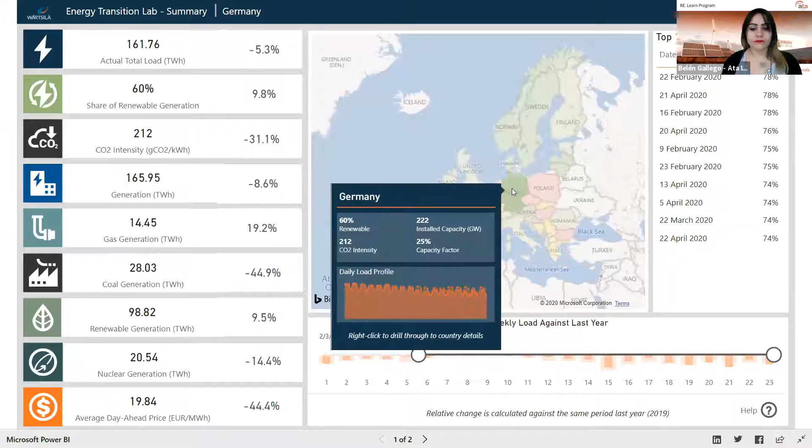So if we drill down to Germany, for example, we come to another page here. I will click on the overview to start with. So here we see the overview stats, most of the same stats as we had on the first page, but with a little bit more detail. We see the generation mix on the left, total load, and then generation by production type below. But if we take a look at the total load, I will open this up a little bit more to see more closely what is happening here.

So this is now showing, I will click on the blue dotted line. This blue dotted line here is last year's electricity load, the load on the German system. And if we then compare that to the total load for this year, we see that the total load has actually dropped quite heavily. We see it starting here from mid-March, and that's when the crisis really hit Germany and when the lockdown started to happen.

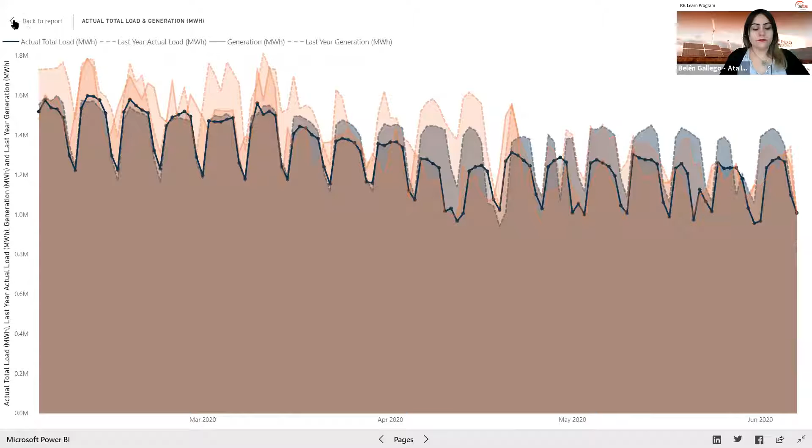And after that, it has gone down, and these are, by the way, the weeks we see here. So this is the middle of the week, and the bottoms here, the troughs, are weekends. As it usually goes, weekends have lower electricity consumption as industry is closing down for the weekend, and then it's starting up again on Monday. So you actually see the weeks in the system, and we see here how the COVID situation has impacted electricity consumption. So it is visible in countries how the coronavirus has impacted the power system.

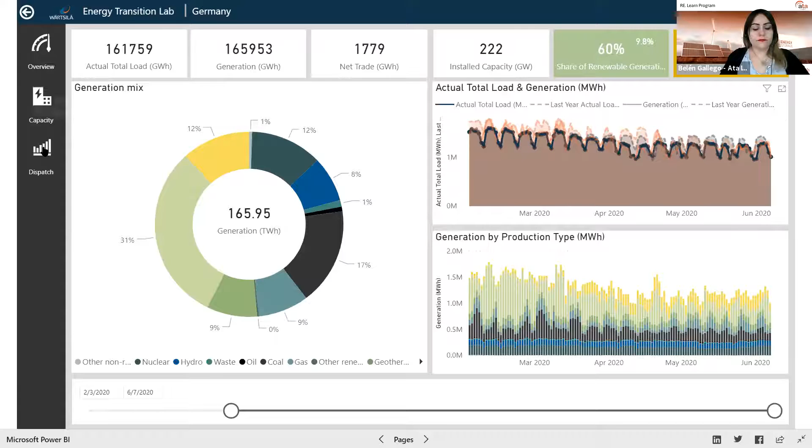If you take a look at the dispatch page here, and if we take a look at Germany as such, this is now showing the dispatch of the German system hour by hour, how it really was. You see here in the bottom we have the nuclear, we have hydro, we have coal, and then on the top here we have light green, we have wind, and then the yellow is solar.

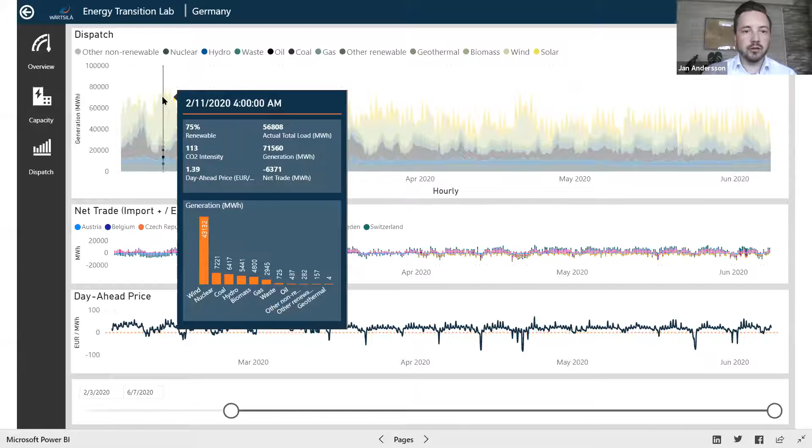And we see in the beginning of the period here, it's still February, so the solar is not generating that much due to the winter season, but the further towards the spring and summer we get, the more and more we see of solar generation. And on a high level look, everything looks very fine here. There are no big issues.

But if you start to drill down, let's take one of the top days here. I will move the slider to April 20th and 21st. So take April 19, and then I take the other slider down to April 22nd. So here we have now April 21st, one of the top renewable days in Germany.

And we see we have a massive solar peak here in the middle of the day. We have a lot of wind coming in. It was a windy week apparently in Germany, and good sunshine. And we see here middle of the day in Germany a renewable generation of 84% penetration. We see a total load of 65 gigawatts, and the generation was actually 82 gigawatts, so not really matching there.

And the interesting thing we see here is that the day ahead price in the box there in the middle of the screen hits minus 84 euros per megawatt hour, and we see also down in the graph here on the bottom, the day ahead price throughout almost the whole solar peak, we have hugely negative prices in Germany.

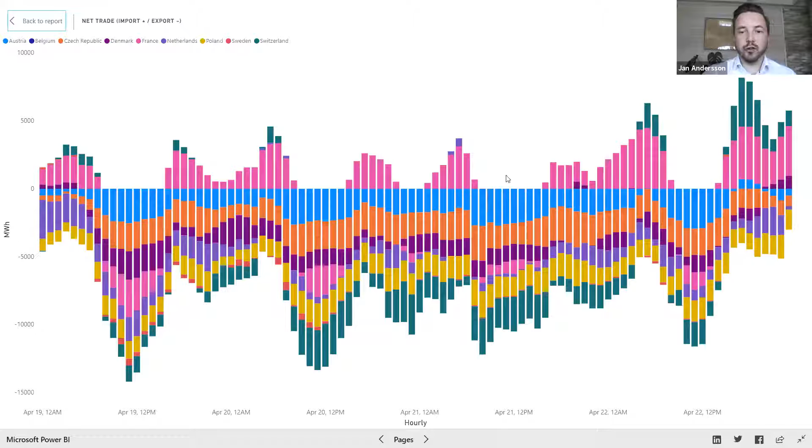So if we drill down to the import-export here, in the middle of April 21st, Germany is exporting a lot of power to the neighboring countries. And as I said, as the power price is negative, they also have to pay the other countries to take the electricity away from them. So these are really interesting stats that we can see.

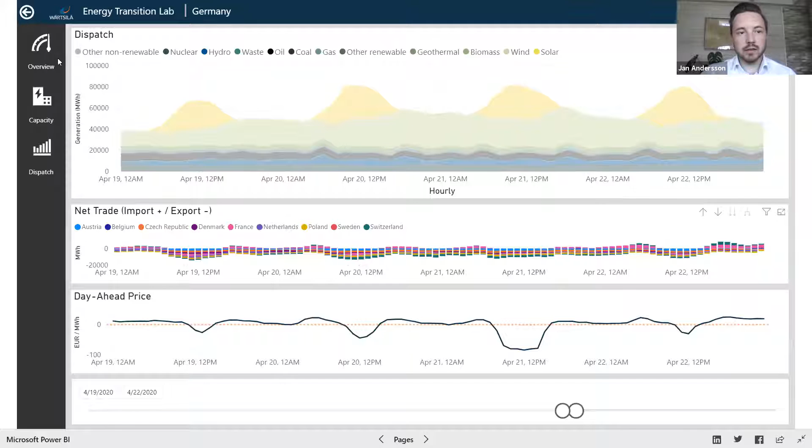If we go back up to the European level, we can take a look at another country here. I will drag the sliders for the days again. So let's take a look at Italy, for example. Italy has now been, let's call it, the poster child for Corona lockdowns. And we go to the overview again to see the load curve.

So if we look at the Italian load here, same curve again. The dotted blue line is last year. I will highlight that by clicking on it up here. This is the last year load. And if we look at the load for this year, we see a tremendous drop here in the beginning of March when the lockdown hits in northern Italy, and now in the last weeks it's starting to come up towards normal levels again, but it's still impacting the load.

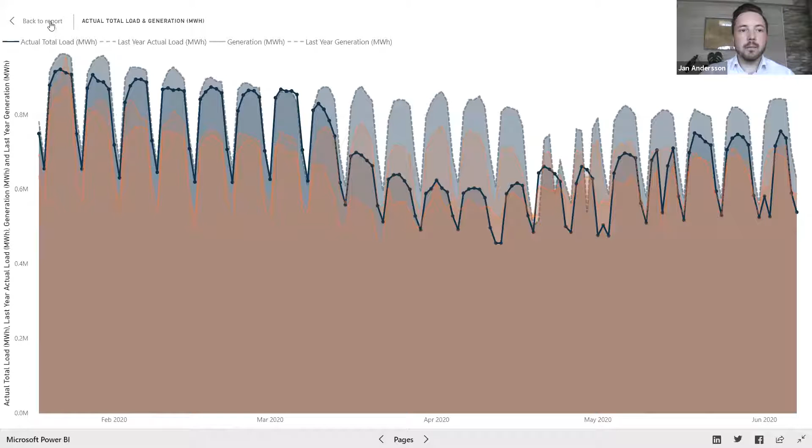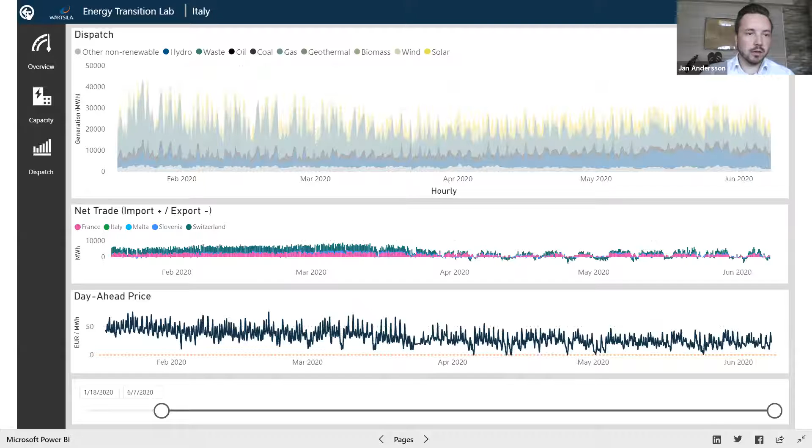So this is really interesting, and we see the same kind of trends for the dispatch as well in Italy. We see an increasing share of renewables, but we also see that gas... Let me go to this one here and zoom in on Italy, because we have easier to see numbers here. So we see that gas generation, coal generation is all down, and day ahead prices are all down.

However, if we look at it on a weekly basis, we see that gas generation is actually making up quite a lot of the gaps between renewables and everything else. So even though the gas generation is down, it is taking the intermediate role there in Italy quite a lot.

I can still maybe take you to Spain as well, to take another country in Europe. And I do encourage everybody online here to take a closer look. This is open to everybody, as said. So just type in Energy Transition Lab in Google and you will find this page.

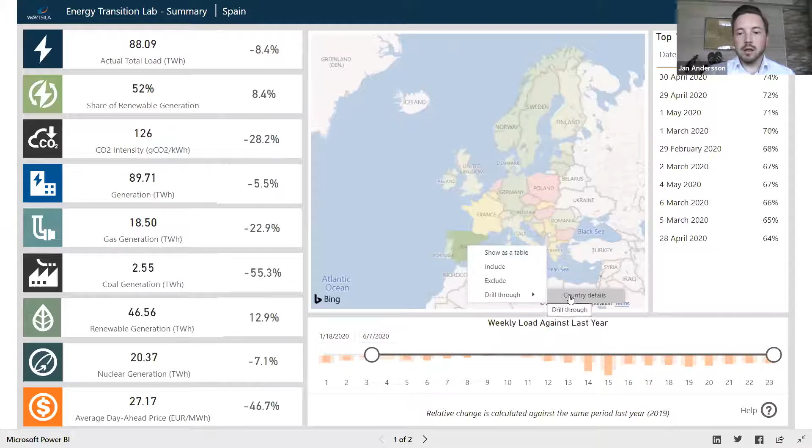So if we go to Spain here, again, the same kind of trends. Load is down, renewables are up, coal generation is down, prices are down, all of that. We see the very same kind of things. If we take a closer look at Spain here, let's start from the beginning of February. We see that during the course of time here, nuclear is actually the one that has been taken offline and reducing load, and nuclear is then giving space and giving room for more wind and solar generation in the power system.

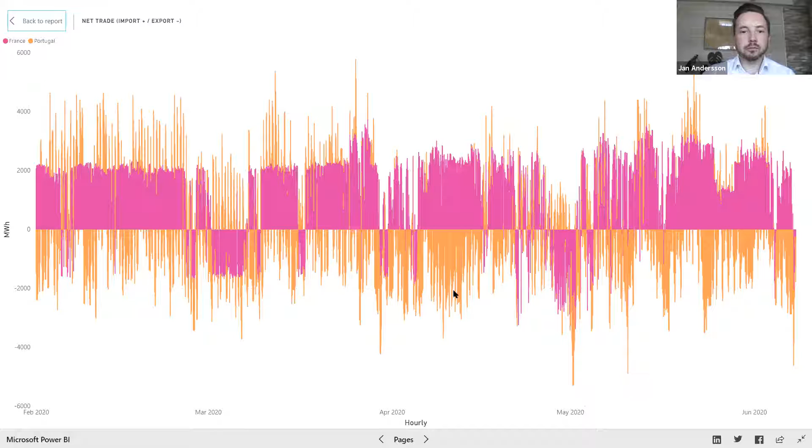So that is another observation here that again, inflexible baseload generation is giving way for renewable and variable generation. Import export. This is quite interesting if we take a look at the import export here. Spain is both importing and exporting, and we can see during many hours of the day and the weeks that Spain is importing a lot of energy from France and then exporting it directly to Portugal. So actually it is Portugal that is importing the energy from France during a lot of hours. And that is a quite interesting observation we can see here as well.

The same kind of thing we see with prices. We don't see heavily negative prices here because the price is not allowed to go negative, as far as I know, in Spain. And that's why we see that the price is hitting a very low of €1, €2 several times during this crisis situation. So by drilling down into this kind of data here, we actually start to see issues, troubles that are coming along with reduced load and with increasing renewables.

And this is, as I said, what we expect to see in 5 years' time, maybe, when we have built renewables in greater amounts into the power system. And I truly believe that this is actually showing us the issues and the challenges that we have today in order to integrate and utilize renewables to a higher degree. And there are very interesting and good technological advancements that are helping us to do this in the future.

And I think by this I will leave the word over to Luke, and he can then explain in more detail what are the new and interesting things that we could take forward to make our power systems even greener than this, and actually reach this holy grail of 100% renewable energy power systems.

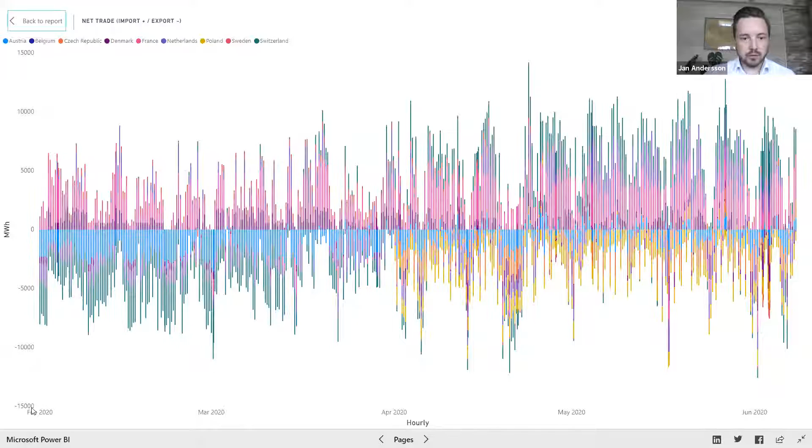Yeah, great. Another one was related to import-exports, the one in Germany. Which countries in the EU do you think are benefiting most from Germany's negative pricing? Interesting thing, what we can see if we drill down to that one. Let me just take... These are questions I have too, so that's why I'm asking. Yeah, very good.

Excellent. So if we drill down here and take a closer look, Germany is situated right in the middle of the continent, and Germany has a lot of connections everywhere. So Austria, Belgium, Czech Republic, Denmark, France, Netherlands, Poland, Sweden, and Switzerland. And what we can see here is that during, let me take that specific day again, so 21st of April.

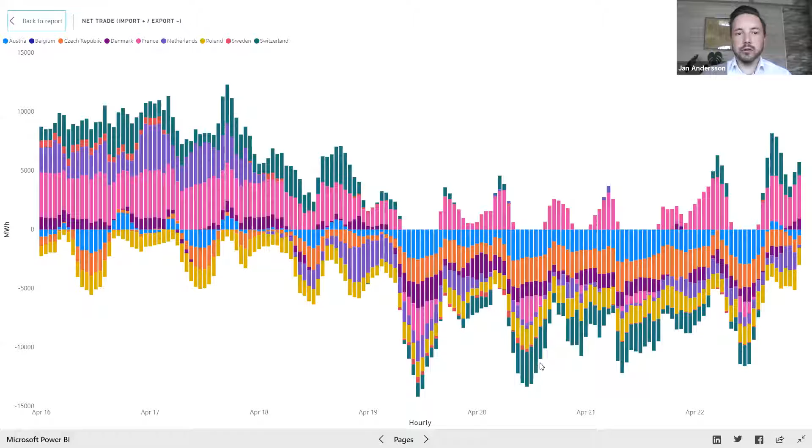So 21st of April, here we see the export in greater detail. So it is actually exporting to all of these countries. It's exporting to all the sides of the country. And an interesting thing also is that it's exporting through Denmark, and from Denmark it actually goes all the way up to Norway.

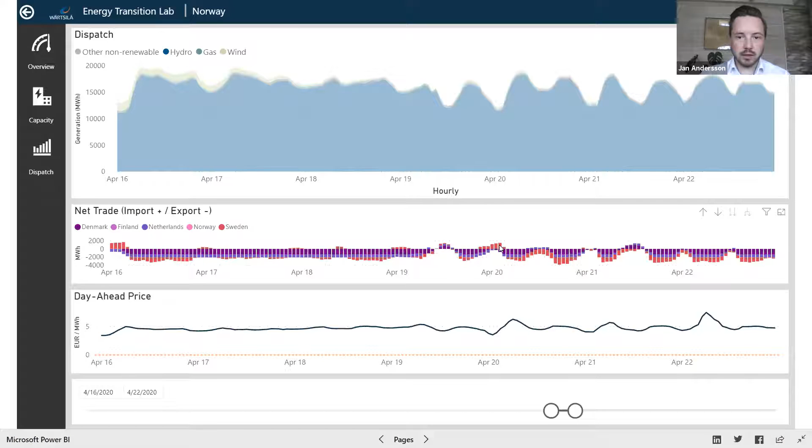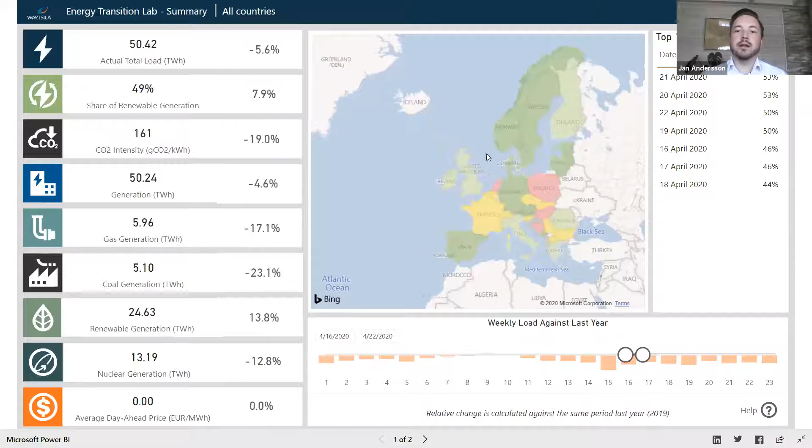So if we click on Norway here and we drill down on Norway, we should actually see that Norway should be importing as well from Denmark to some extent during some hours. So Norway and Denmark are actually benefiting quite a lot. Norway can save on their hydro quite a lot. They don't need to run their hydro, but they can actually save it for later and dispatch it then to Central Europe at a later time.

We also see a lot of power going to Poland, a lot of power going to France. We know, of course, that France has a very big share of nuclear, and it's not always easy for France to regulate downwards and take that on. The same goes for Poland. There's a lot of coal generation in Poland, and it's quite inflexible.

What I understood from before as well is that a lot of power actually goes from northern Germany through Poland, through the neighboring countries, and is entering back again in southern Germany. So Germany can also be utilizing the neighboring countries for shifting energy from north to south. And that is then due to internal transmission constraints on the north-south line. So these are the kind of interesting things as well. Excellent question, by the way.

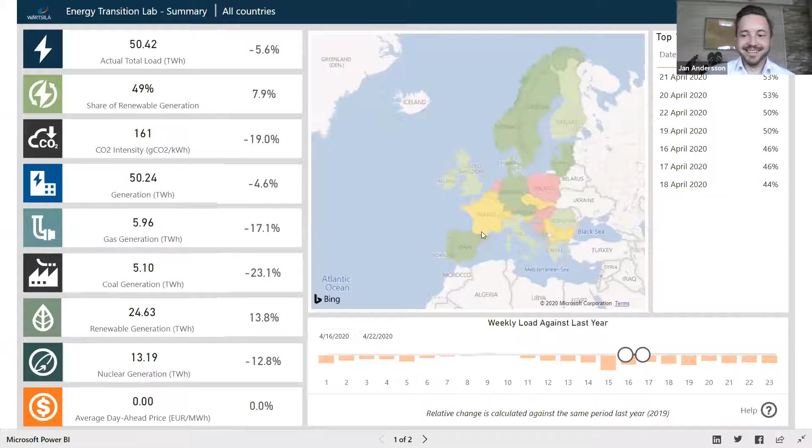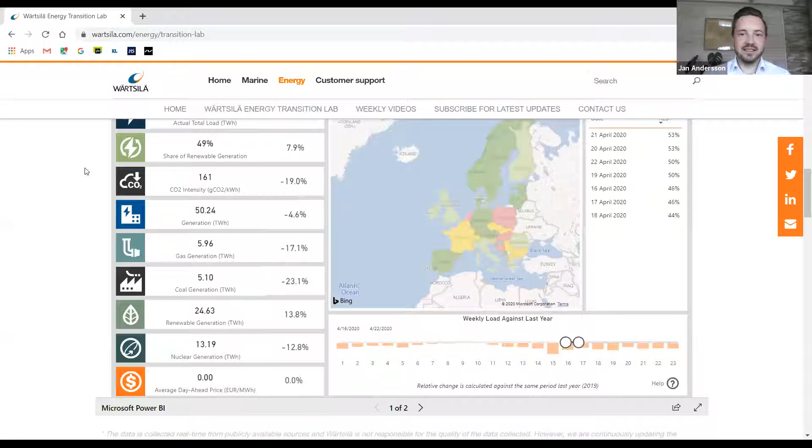So thank you, Jan. Thank you, everybody, for the good questions coming in. What I want to focus on a little bit next is some of the projects we've done in terms of supporting higher renewable penetration. So as Jan mentioned when he was looking at Germany, there was some thermal baseload left running. There's two main reasons that it gets left running, and arguably even a third one. So I'll just mention them briefly.

One is that it's needed for the night, and it's too short a time, maybe 4 or 6 hours, that you would need to shut it down, and then it would have to start back up again. Those types of inflexible plants can't do that. The starting and stopping costs are too high, and it makes more economic sense to push through, or it might even be really not technologically feasible with whatever's installed at those older plants.

The second one is, as Jan mentioned, stability of the system. So those systems are providing some type of frequency and especially voltage control, that they are forming the grid. You can't even have a grid without that rotational inertia, without those spinning plants.

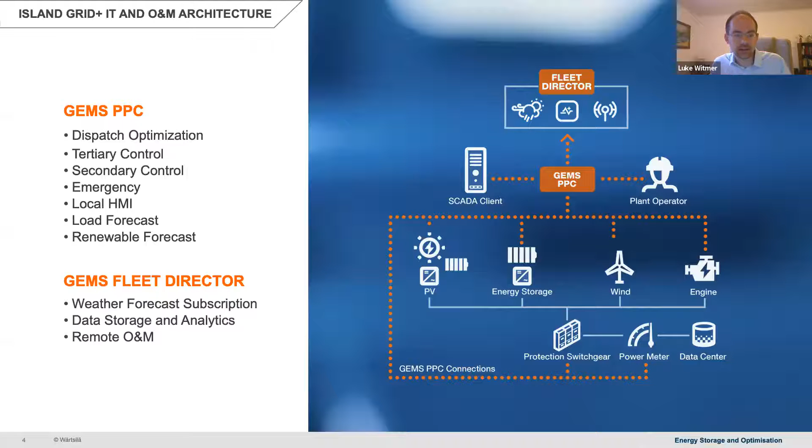So there have been a couple of projects which we've tackled, which are small compared to Europe, but the technology has been proven and continues to grow orders of magnitude in terms of the deployments each year, where we are pushing the renewable penetrations further and further with arguably smaller batteries than we did at first.

So in the beginning, which I'll talk about on the next slide, there was a battery system on the island that was more than enough to even cover the whole load. And that's not realistic for Europe. For Europe, battery technologies are being installed more and more, but they're not going to be at a level where the whole grid can be carried by batteries.

And so this project here in the Caribbean is really relevant because it's a small battery. It's a 6 megawatt battery on an 18 megawatt grid. And so here the battery is big enough to cover a loss of half the wind farm at any time, as well as a loss of each of the large engines at any time. So it's sized for that spinning reserve application, and it's a grid forming battery.

So it can start up like a UPS. It can bring up the whole grid all by itself. And then once that grid is up, then you can synchronize other assets to it. So it's the same as any type of thermal spinning plant. It's providing virtual synchronous generation. So it's forming that grid. It's running in parallel with the engines.

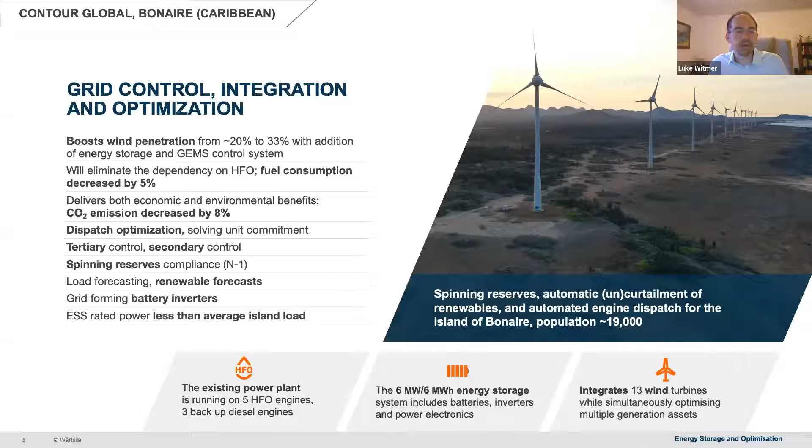And it responds very fast, sub-second, sub-cycle. So within a few milliseconds, it's already going to be dynamically adapting and starting to output power when the frequency starts to dip. What we see in Europe is that thermal plants get left on to create this voltage, to create the potential difference so that the grid can even exist. And if more and more batteries can be brought onto the grid, then the grid can be formed by those batteries and the renewables can flow freely.

And so our project that was completed last year in the Azores, right off the coast of Portugal there as part of Portugal, is 100% renewable capable, that we can switch off the thermal generation completely and form the grid with the batteries in virtual synchronous generation mode, so that those engines can come and go from the grid as they please, that there's always a voltage and a frequency to synchronize to. And this is a really important piece of that puzzle, is having that type of technology.

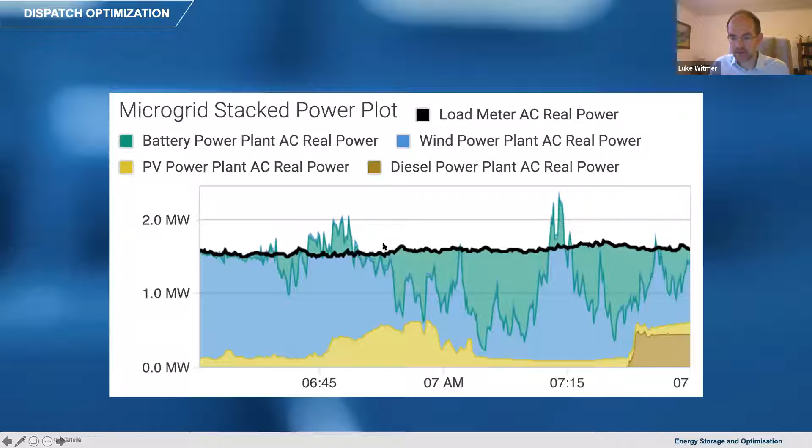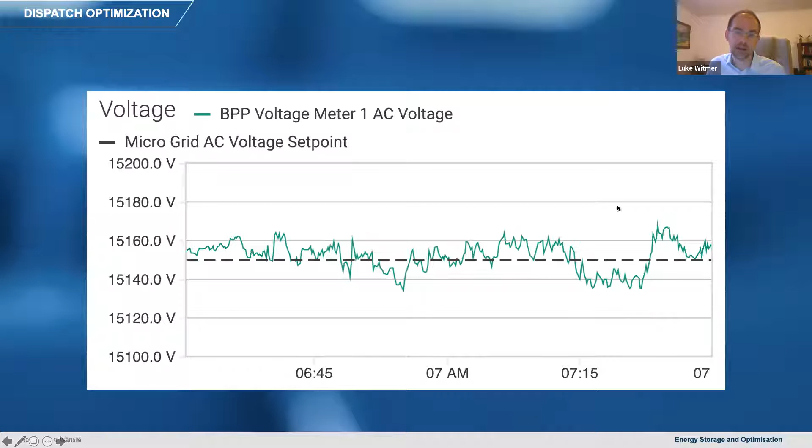And this whole time, this exact same hour, the grid frequency is very stable and flat. And the voltage is very stable and flat, because that battery is providing all 3 of those services that we talked about in the beginning, that it's stepping in to fill the gap whenever it needs to and balancing the grid so that we can have those engines completely off.

Can you stop sharing, or let me do that for you? I can, no problem. Oh, perfect. Yeah, and I'm gonna open your microphone. No, can't. You're gonna have to open it yourself again. Oh, yes. So you've been busy, but still, you're just managing to keep up with demand. I can't answer all the questions. There are coming a lot of questions, a lot of excellent questions as well. So keep them coming. Is there anything that you need to show again, or is there any question that you'd like to show the graphs for, or can we do without the graphs again? I think we can do it without the graphs. Okay. Would you like to start with any specifically you were looking at? Otherwise, I'll just read a few. I had a question answer box open here, so I can take one here.